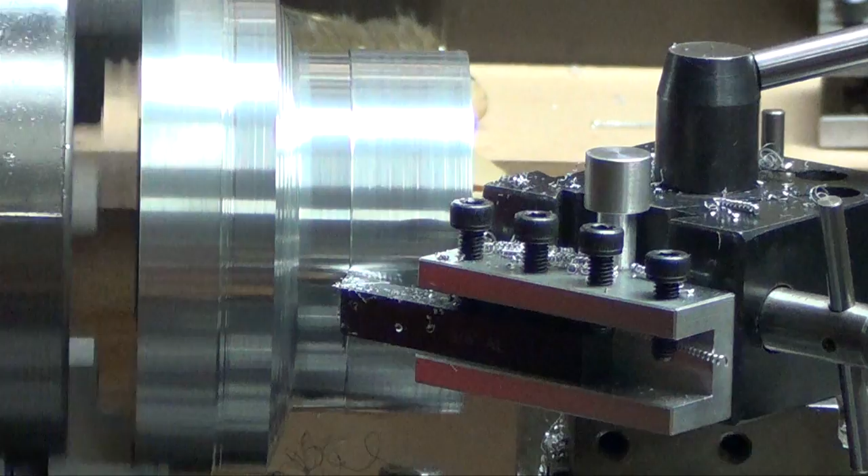First, a little background on this guy. A viewer lives back east, close to a river, which overflowed and flooded his basement, which was his machine shop. I saw a picture of his mini lathe all rusted up and pitted, gone. So he emailed me saying he was going to get into a different hobby now, which is engraving, and asked if I would make this handle. This thing's basically just a miniature jackhammer - there's an engraving bit that goes into it and you engrave with it.

I had like 3 projects in process here, and I was thinking, I felt sorry for the guy, why not, I'll make the handle. And I did. Then I emailed him a picture of it, and he said, fantastic work, and you're almost done. I'm thinking, what do you mean I'm almost done? So evidently he wanted me to make the entire engraving tool.

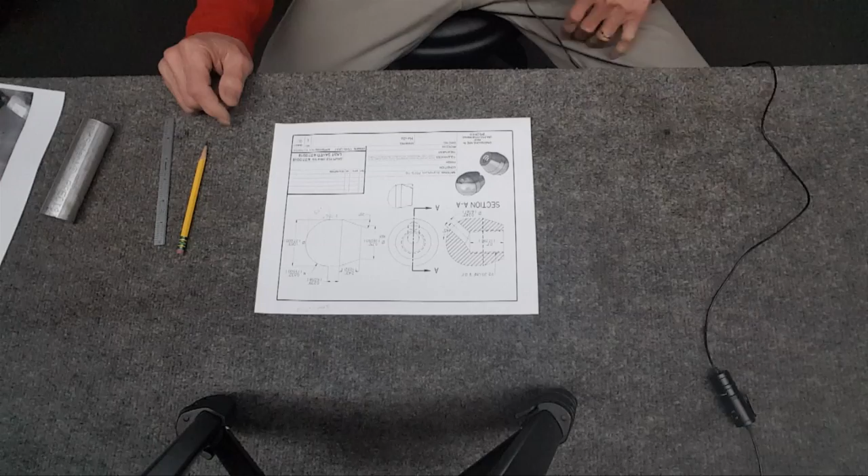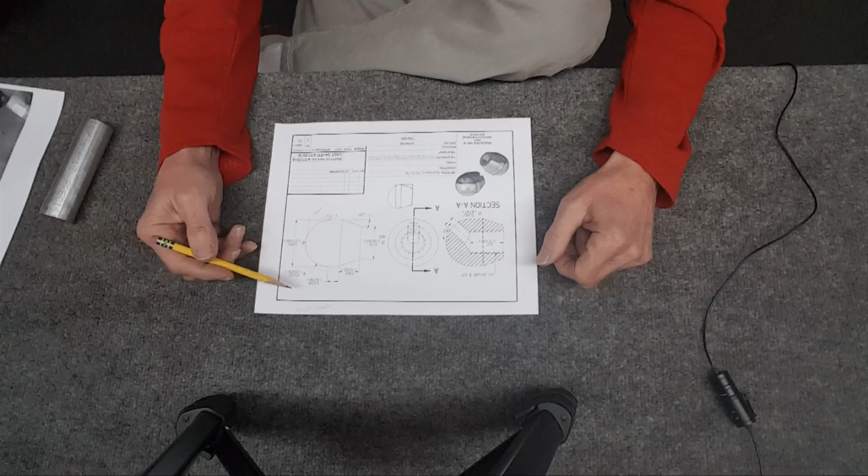Looking at this print, originally I was thinking this is a teeny little handle here. This is obviously not to scale, so here it is kind of roughly drawn to scale. Looking at a lot of this stuff, these numbers are crazy - again, this is a handle. Tolerances are plus 2,000ths, is that 2? Yeah, there's a point there. Plus 2,000ths minus 0. Crazy. So that's not going to happen.

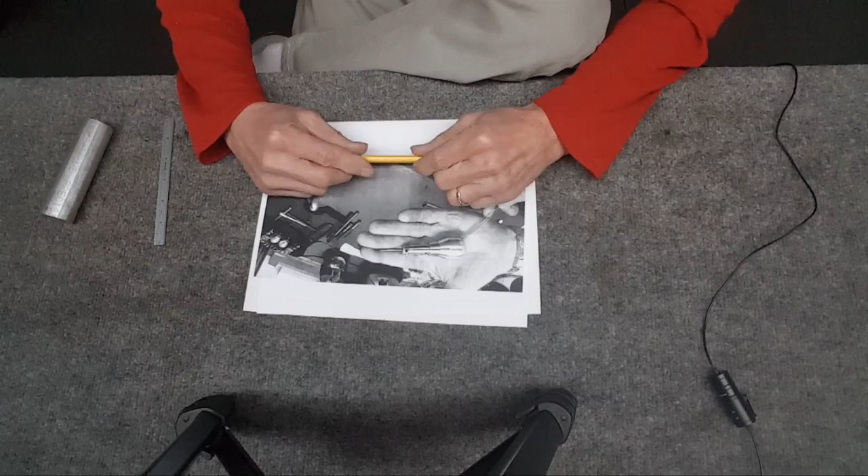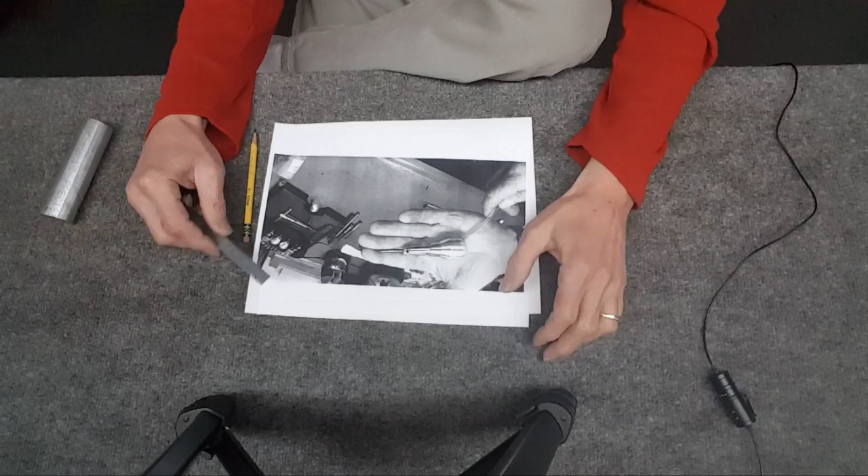Originally thinking I should be making this thing bigger, because I don't know how you hold this thing, it's crazy. But went back to the video of the guy that made this thing, his part 1 showing it off. This sucker is indeed small, because this is the lock nut from here to here, so this is it. I'm trying to measure that on my hand to say, yeah, that's about 1 1/4 inch.

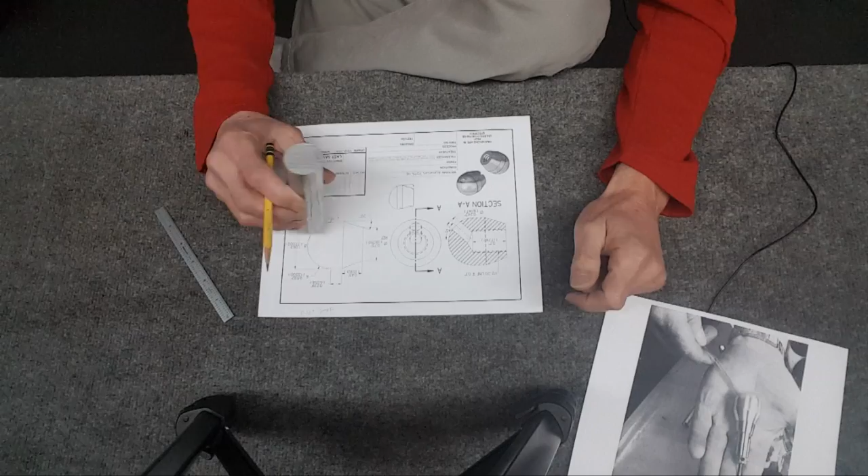The video he had making just the handle is where I got the dimensions for the stock, because they don't give this dimension here from here to here on the print. So he started out with a 1 1/4 inch diameter. So here's 1 1/4. And he had it at 1.26 long, and that was the raw material, so you're facing off some and so on.

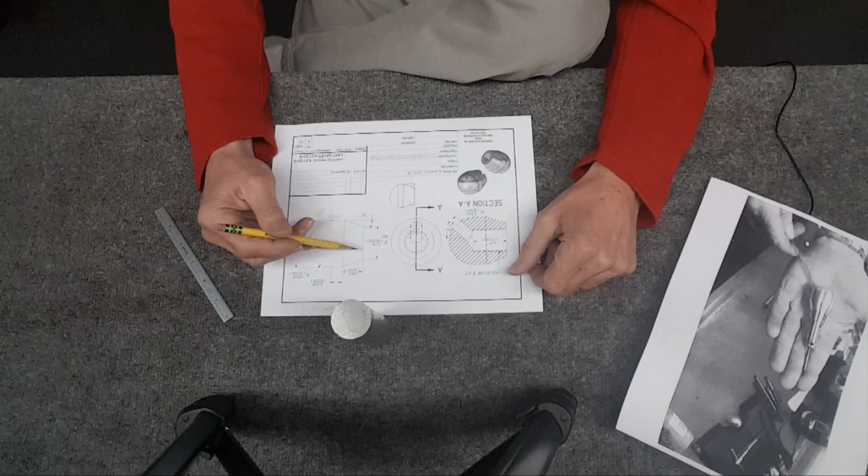I'm thinking I have to meet this number right here, hopefully that's correct, because it's got to match up correctly with this lock nut that he makes. So I'm thinking, I'm probably going to make it actually to numbers here, because if I make it, I can make this bigger. My jaws will hold 750 thousandths, so I can clamp this part, drill, tap, and then do this edge.

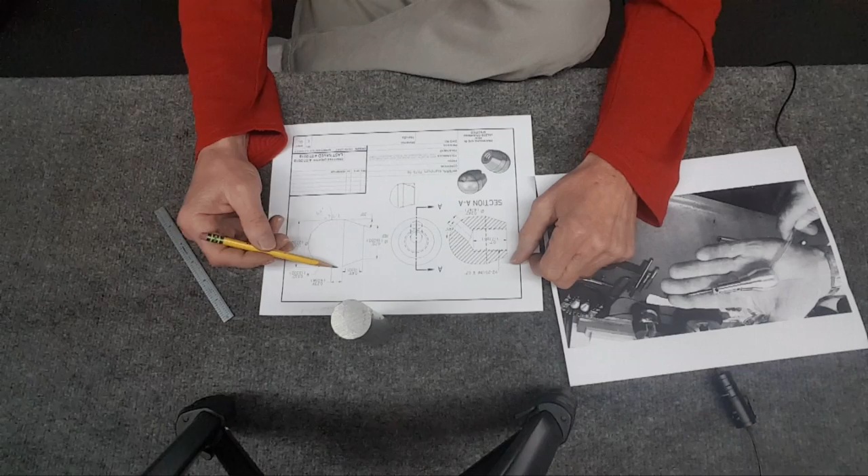And his picture's completely different - look at this, this is way longer than they're showing here. And 240 thousandths, that's crazy. So I can clamp it, and I should be able to do this, and then I should be able to turn just this part to get the turn it all the way down like that. That's taking 200 thousandths off of it. I don't know.

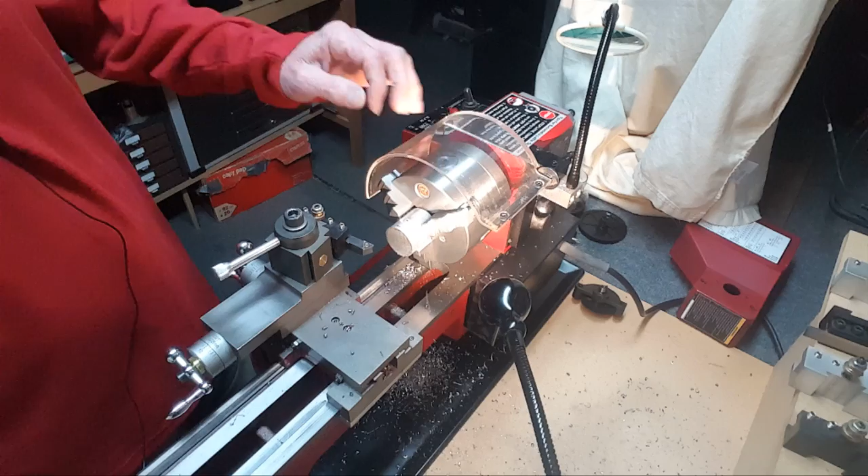Hey, come on, lock down. There we go. So just a quick face job, drill and tap it out then. Where it is, there we go. Maybe take more than that off.

But you can see, I just went in 2 thousandths, and it's pretty flat. Go in another 2. Let's see, there's 2 more thousandths. Almost there, huh? I think it's about 5 thousandths off or something. No, I already went 4, so whatever. It's looking pretty nice.

That's definitely got it, I think, now. Should be using some cutting fluid, but whatever. I got it? Yeah, that's got it. Alright, so now I just need to set up for

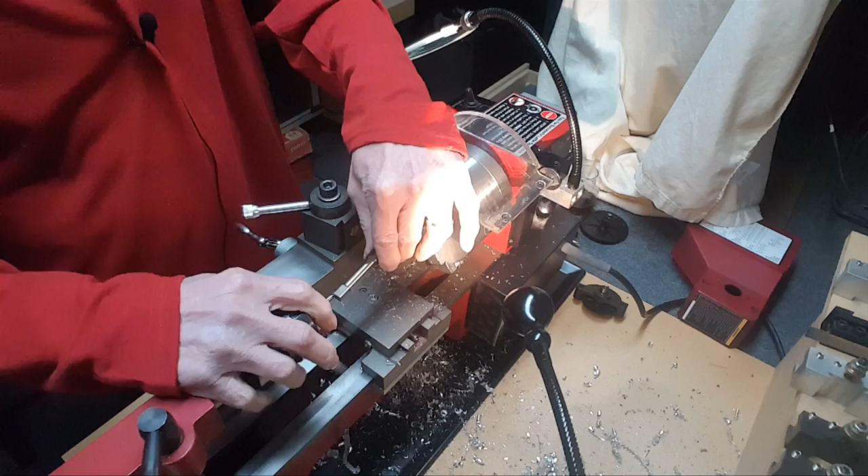Whoa, I'm off the edge. Wow. Just barely gonna make it. Oh, I can bring the tailstock in, you dummy. Back as far as you can go. There, that'll give me the room now.

And I am gonna use anchor lube on this because this is gonna be a lot of horsepower to get this done. I guess I can put it in place. There, compress it, lock it down. And am I on it? No, I wasn't on it. Alright, I am now. Hate using this stuff though. Ooh, yeah, it's going to spin good. Because it's water based and I'm always afraid it's going to rust up my tool. Okay, wrench. Here we go, huh?

Let's see how much force this is going to take. Wow, yeah, that's a lot already. Oy! Alright, so this is going to take some doing here.

I'll probably have to get a bigger Allen and work my way into this thing. Drilled, tapped, threaded, everything. Faced off, so I'm pretty set.

Well, I do have to take it down because I can't spin it around and grab this.

So they want what? 1.63 thousandths. I'm at what now? Where'd the calipers go? I lost it. Oh, there they are. I'm at what? I'm up there.

1.236 thousandths. So I'm thinking I'll just take it down to 1.1, I guess. So all these gears are making a lot of noise for some reason. So there's a 10 thousandths cut going in 5.

And chips all over the place. So it's just a matter of keep going. So that would be 10. There's 20 thousandths off of it. So I just got to see how far back it comes with respect to that point right there.

Turned it around, put it in some paper here so I don't mark up the finish. Turned down the extra here so it's almost within a few thousandths of hitting the surface. So now I'm just trying to, probably should have faced this off, I didn't, but I'm just kind of freehanding it here. I wish I had something else that I could judge with.

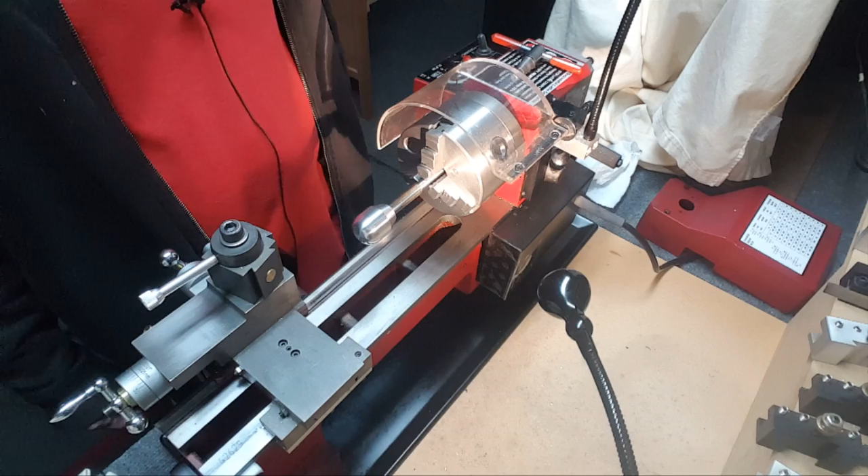Let's see how far I can get. Almost done. One last thing to do is drill the hole in there. But I wanted to sand this whole thing, and I didn't have a 1/2 inch 20 TPI bolt, so I just put the tap back in there. It's pretty good.

I was thinking about milling a slight flat spot before drilling out the hole. Looking at the picture, they're just jamming the air hose in there, which is kind of scary. I was thinking about putting one of those little barb fittings on it. Cleaned up the mess, chips all over the place, still a few on the floor I gotta get.

But I guess the last step is just to drill this hole. Always scary doing the last step, because you put in hours and hours making it, and then you can have it mess up.

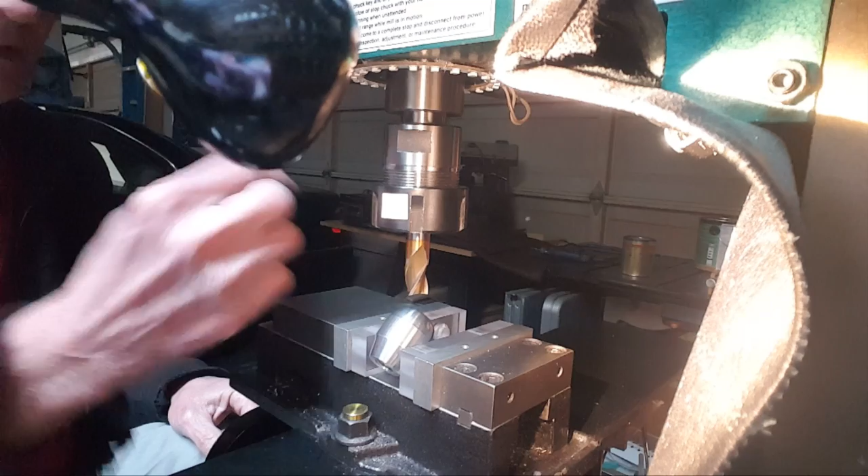So 45 degrees is what the print calls out. Stick it in there between the aluminum soft jaws. It's at 45, seems really solid. I'm going to take it easy here because I didn't like the idea of jamming the hose in there, so I've got a hose barb that'll hold it, same size as what they're showing in the video. I'll create a flat spot before I drill.

Alright, it engaged. Somewhat of a flat spot, then drill and tap it out. Let's see what's going to happen here. Wow, alright, fairly good RPM. Yeah, that's good RPM.

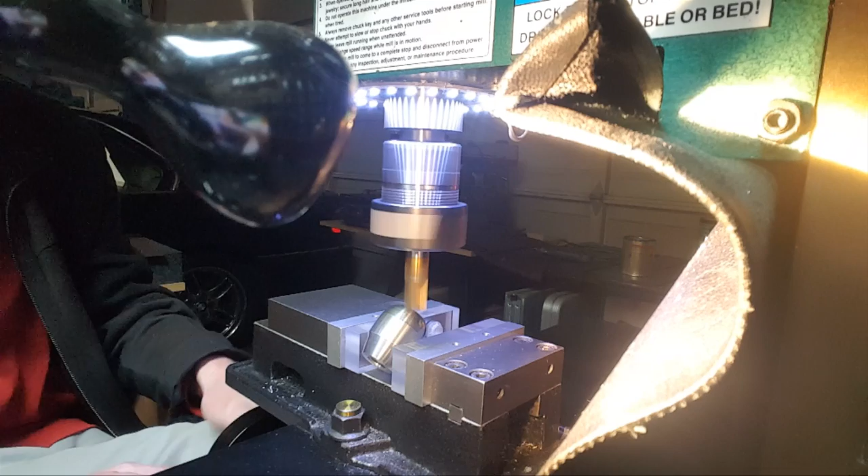Am I going to touch? Yeah, it's just scraping that surface. Come down a little bit. Alright, I really want to pay attention here to what I'm doing so this doesn't screw up. So I'll bring you back when I've already drilled it out and I'm going to be tapping it.

Seems like, I'm surprised the barb isn't a pipe thread or anything, it's just 10-32. And it already has sealant on it, so it should go in there just fine. Sorry about the blurry light here, let's see, make it better.

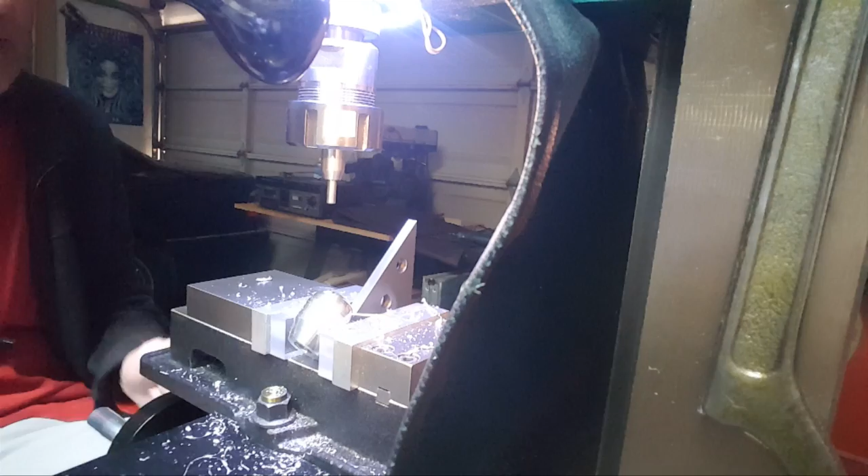Unfortunately, I didn't hit the bottom piece, so I'm going to have to come back in and drill through there. I did catch this thing tilting, which is nasty. Oh right, I need my wrench here. Where's the wrench? I gotta put the mic down. Come on, off there. Wrench was way over on the other bench, so mic goes back on.

Okay, I'm gonna use Tap Magic for this. Taper tap, again, still gotta go easy on it because it will tilt on me, so just slight pressure. I was holding this in place to try to support it while drilling. Yeesh, how am I going to do this? Easily, I guess. Carefully.

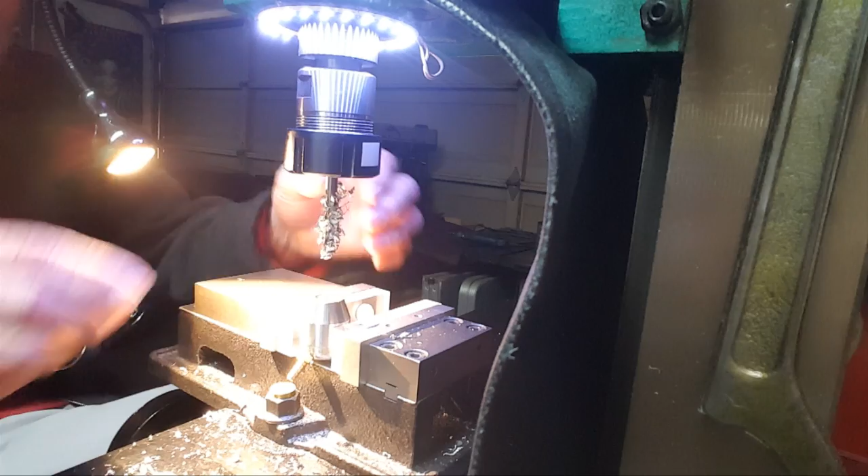It's still tilted, right? Yeah, I think so. Great, alright, got to do this off camera. Well, I got it. I just put an air hose on there and it blew through, so that was a 1/4 inch drill bit. It's basically done now.

And no marks on it. A lot of chips in there, but there it is. Looks pretty cool. Job done, ship it off.

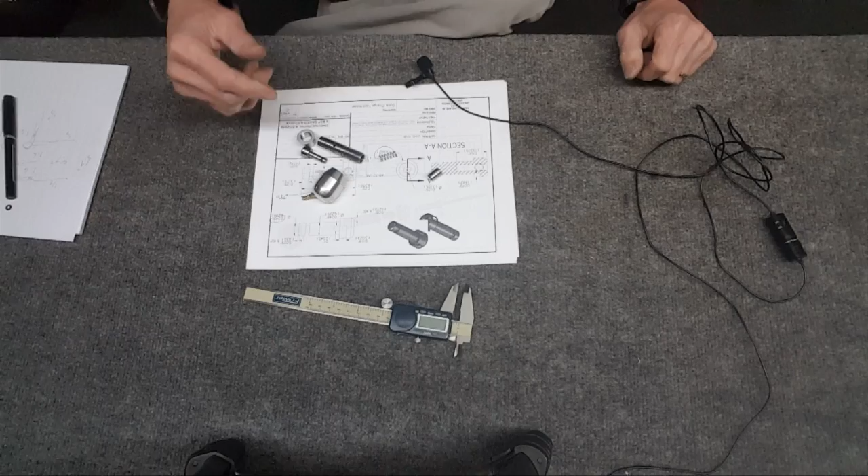After a lot of work trying to figure out these prints too, there it is. This was the tough part to make and lap inside to get it all nice and smooth, but pistons, good fit, doesn't move, so it's airtight. A spring, I don't know what spring it's supposed to put in there, but undercut just like it's supposed to be.

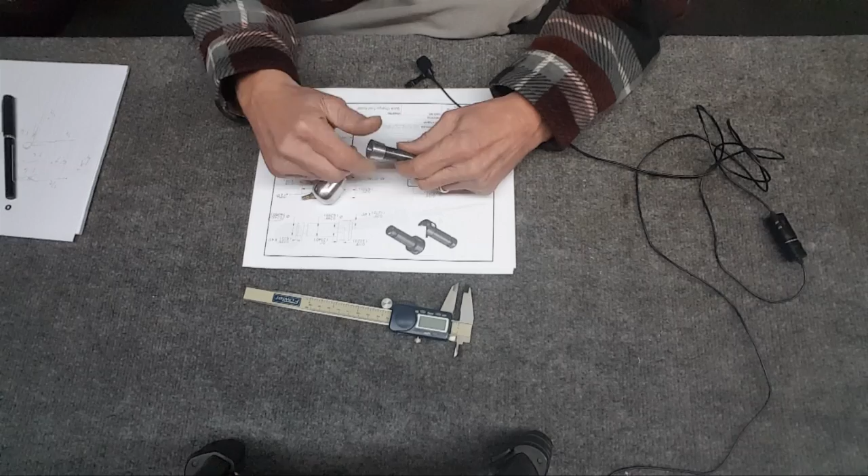Threading here was really a difficult thing to do, but what was that, it was a 1/2 or something like that. But there's that, complete with a fitting that'll fit the tubing correctly, because I already put a piece of tubing on.

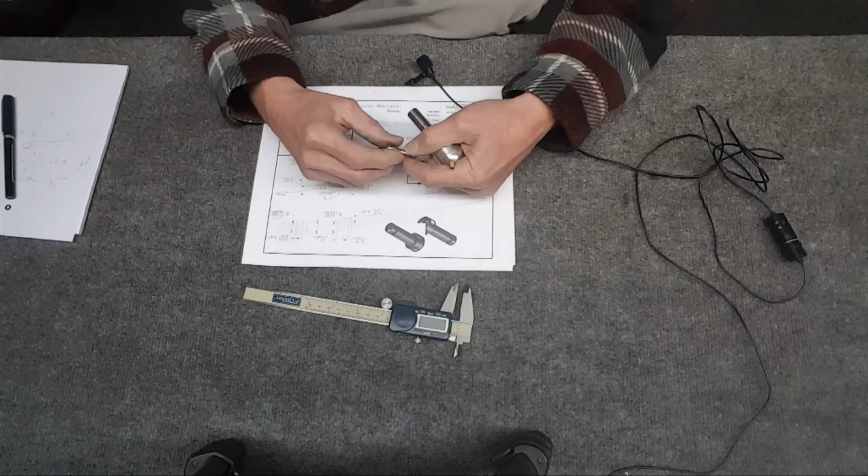They called out a bigger set screw here, 8-32. I wouldn't be able to tap through 8-32 because that hole is smaller than the drill bit for that, so it's a 6-32 set. So that's it, and it makes a lot of noise and works, good stuff like that.

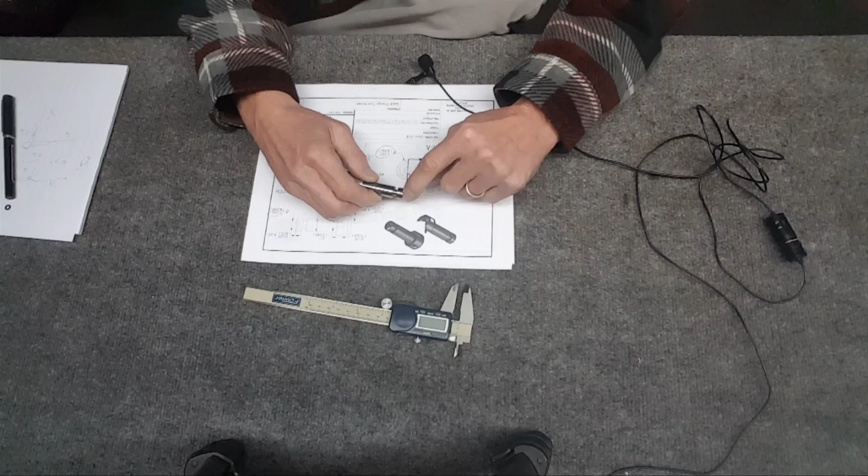Unfortunately, though, I did have an accident. I accidentally hit this thing when I was hacksawing it off. Ugly little mark, but what a lot of work to do. But hope you enjoy it, my friend.